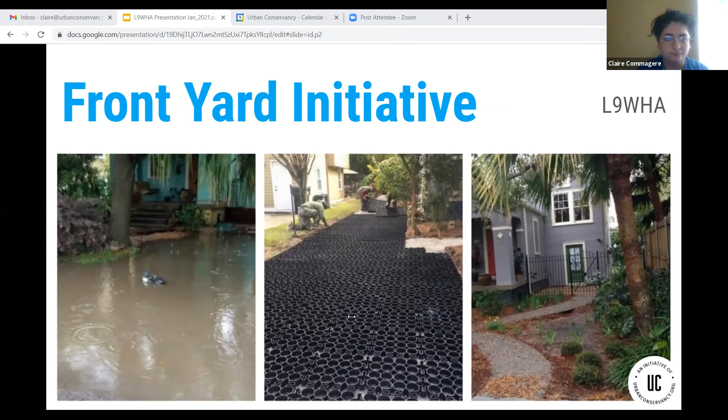So let's first talk a bit about what it means to live with water in a city that has a complex relationship with it. New Orleans was founded over 300 years ago specifically because of the region's unique water assets. The lake, the river, the Gulf were all extraordinary means of commerce, but they also complicated the logistics of settling in this low-lying, swampy area surrounded by water that would, and still does, regularly flood. For many residents, this photo on screen now can represent living with water. After an average rain event, we have ankle-deep water, car flooding, standing water for days on end, mosquitoes, even duck ponds. In this situation, water could be a thing to fear, something that makes our lives harder. But at FYI, we are working to change that, one block, one house at a time.

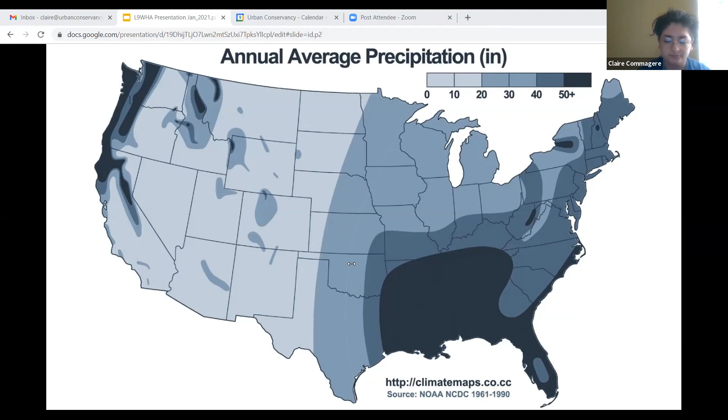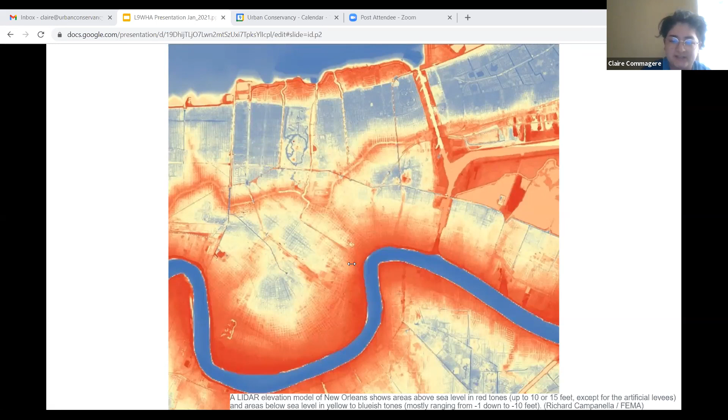Third, we are overly reliant on old and inadequate gray infrastructure. Gray infrastructure refers to traditional forms of water management, such as levees, floodgates, and pumping systems. At the city level, we've heavily relied on a single approach to water management: every drop that falls must be pumped out. This approach is not only resource intensive, but is also the leading cause of subsidence in our region. Subsidence is the sinking of land. Many of you are probably overly familiar with this concept.

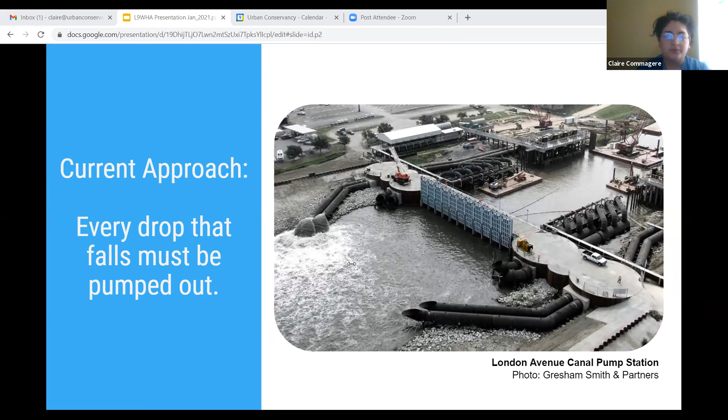Subsidence leads to foundation problems for your house, potholes that appear overnight, and yes, more flooding. So we end up at an even lower elevation than where we started. And now we have these great big concrete walls, yes, preventing seasonal flooding, but also preventing new soil being introduced to our quickly depleting lands. Unlike other cities, the gray infrastructure we built here can't keep up with the amount of rainfall we get. It can't completely prevent flooding, but it does deprive our land of the water it needs.

This all leads us to where we are now. Where do we go from here? That's a rough one. There are no clear-cut, easy solutions, and a lot of them are not within our own individual control. But something that we can do as individuals to help reduce flooding and subsidence is reduce the impermeable surfaces on our property and add a lot of green infrastructure on our property.

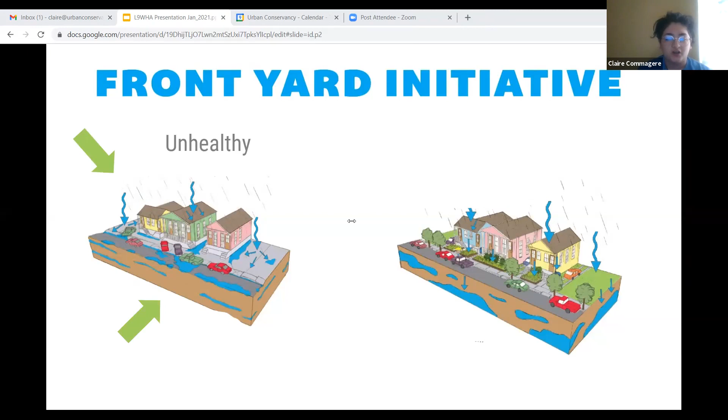So let's take a look at what happens when we rely only on gray infrastructure for water management. This is an unhealthy block. Rain falls, hits paved surfaces, runs into the street, and then often overfills the drainage system, causing flooding. Because water does not make it back into the ground to keep the water table full, clay soils expand and contract, causing subsidence. That's when we see problems such as foundation issues and potholes.

In contrast, this is a healthy block. What you see here is a lot of green space, native trees and plants. Cars are parked on the street instead of their yards and sidewalks, and there's overall less impermeable surfaces. A healthy block handles water on site: rain falls, and instead of being pumped out, it soaks into the ground. This recharges the water table, slowing subsidence and keeping our soils stable.

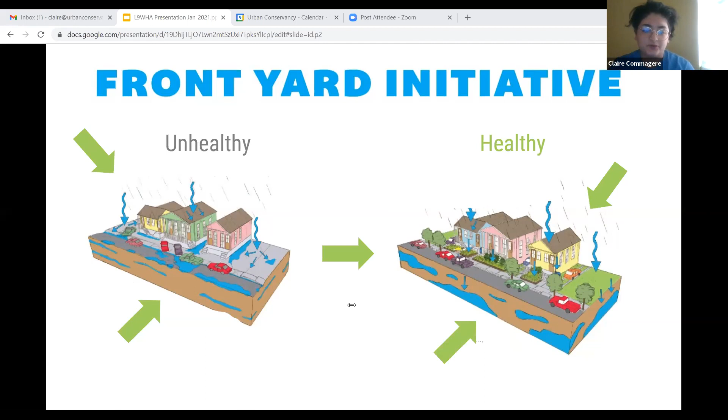Rain has changed from a stressful event to a peaceful one. The homeowners no longer have to rush out to move their cars or create makeshift bridges to reach their house. They can sit on the porch and enjoy their new yard, knowing their home is protected from flooding. Plus, they are reducing flooding for their entire street because they are located at the lowest point of their street.

Flooding is often homeowners' first priority and what brings them to us, but soon they learn that the green infrastructure and plants they choose have multifold effects. For example, added trees decrease the heat island effect, and native plants bring back lost habitat that is important to wildlife and pollinators. And new green spaces encourage people to get outside. What's good for the planet is also good for people.

Now that you understand the framework of why we do the Front Yard Initiative, let's learn more about what green infrastructure is, because I keep on saying the word. So what is green infrastructure? It can come in many forms, but basically it's any system that mimics nature to manage stormwater. There are three main ways green infrastructure helps manage stormwater: retention, detention, and filtration.

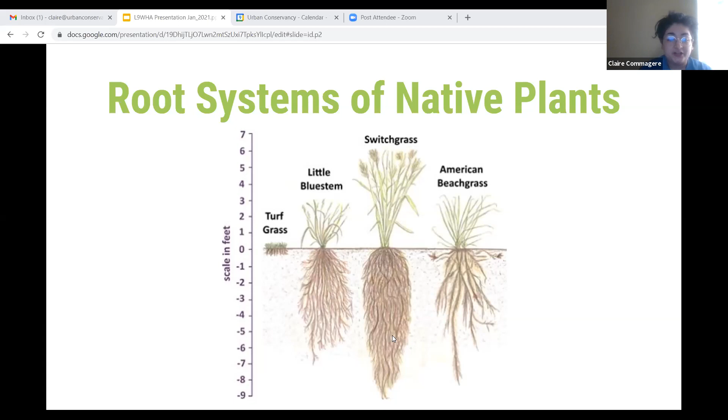Roots hold soil in place, preventing subsidence and erosion, and at the same time, roots aerate the soil, keeping it flexible, preventing compaction. Because when your soil compacts, it can become almost as impermeable as concrete. Plus, this is why native plants do better during our long stretches of dry weather. Their roots have evolved in order to be able to reach our groundwater. Some plants are even known to remove harsh pollutants from our water and soil.

And so our next form of green infrastructure is rain gardens. You can take your native plants a step further and plant them in these rain gardens. So what are rain gardens? They're an excavated area that uses special bioengineered soils and native water-loving plants to create storage space for water, slowing, retaining, and filtering stormwater before it reaches our drainage system. So what I mean by bioengineered soil, I just mean a blend of sand, compost, and topsoil that is made to allow water to seep into the ground.

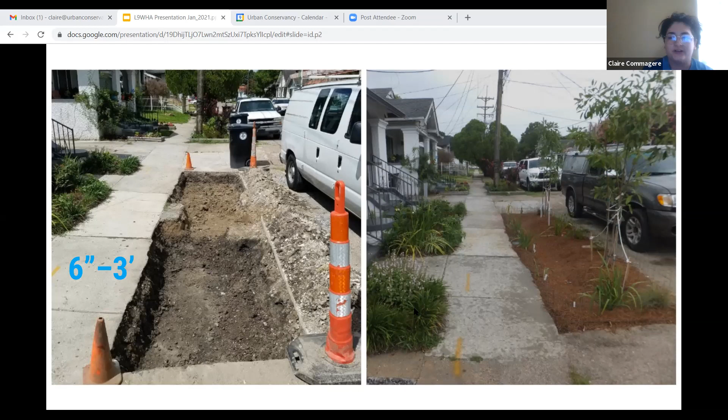It also isn't healthy enough to sustain the new environment you're trying to create there. So if you keep on putting plants in the ground and you feel like you're watering them the correct amount and they're getting the correct sunlight, it might be your soil. Here's a cross-sectional view of a rain garden. You can see, like most green infrastructures, that there's a lot going on underneath the surface that aids in water management.

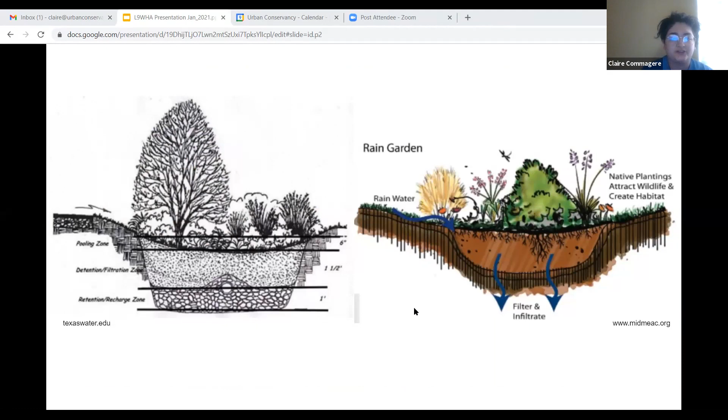The pictured driveway here can hold over 2,000 gallons of stormwater. The homeowner has actually gone back to us to let us know that her basement used to flood even during a typical rain event. But now, even after 5 inches of rain within an hour, she is left with no standing water. It is the first time apparently her bottom basement area has not flooded in years for a rain event of that size.

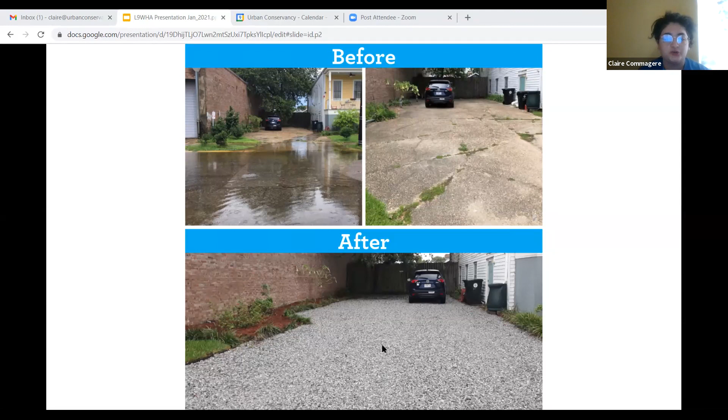This is an example of a driveway using geogrid. Geogrid is important for holding and dispersing gravel, which prevents the gravel from compacting and turning into an impermeable surface over time. It also maximizes your water detention. So going back a slide, that plastic stuff that this truck is on top of right now, that is geogrid. It's usually made from like a recycled plastic. A really popular brand here is called TrueGrid.

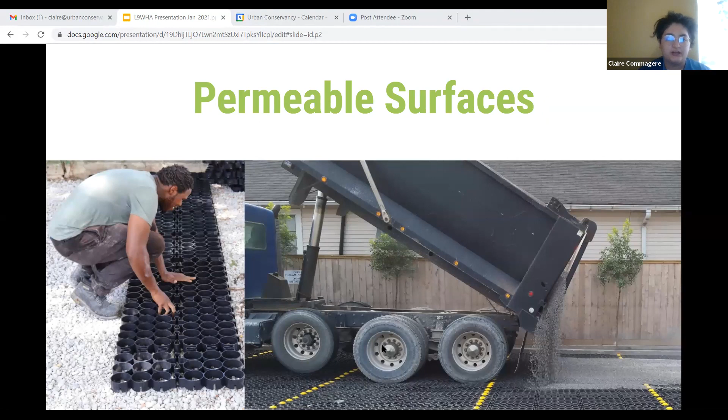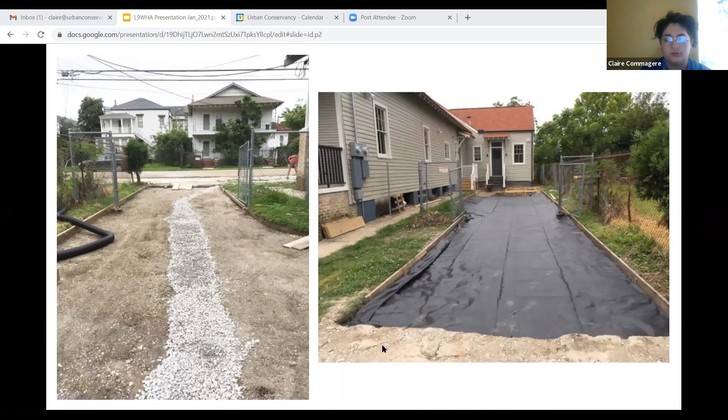And remember, most of what makes green infrastructure effective is what is going on beneath the surface. As you can see here, an area has been excavated with the middle dug even deeper for a perforated pipe to be placed. The pipe is then covered with number 57 washed gravel, and then the whole area is covered with a non-woven permeable filter fabric. This is the finished product.

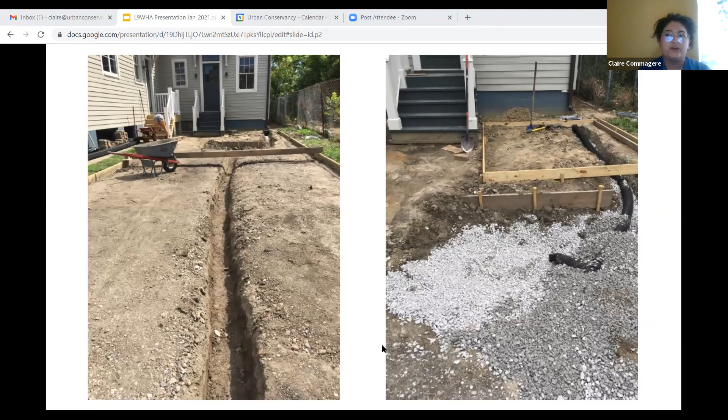It's a permeable driveway with a rain garden that holds an estimated 4,000 gallons of stormwater. And it looks just much better than the original product. Something I wanted to point out here is that since the pipe is dug in the middle, it is actually directing all the stormwater into that middle part and moving it away from their home. So green infrastructure is also a really good system to manage where your stormwater ends up, because you want it away from your house.